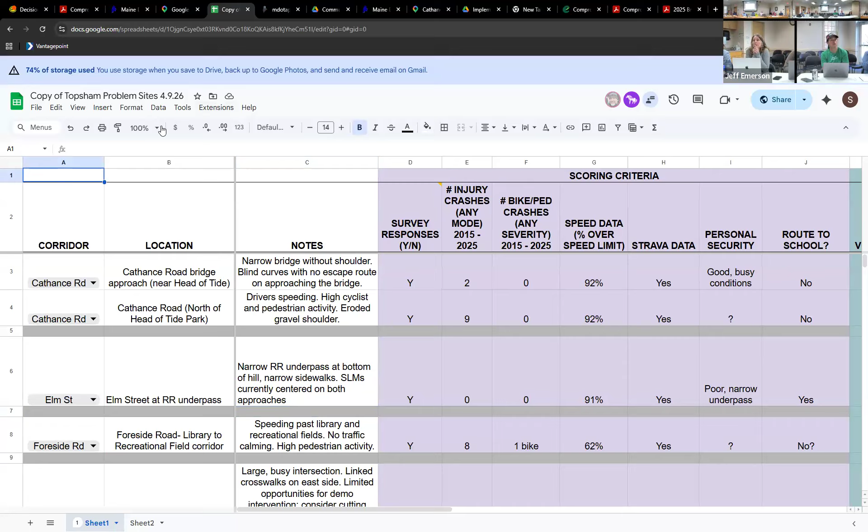Can you make it as big as possible? That's as big as I can make it. I don't know, that's as big as it can go. What if you jack up the font? Yeah, I can make the font size larger. Can you do the, just where the, can you do that thing and make it bigger? Oh yeah, good idea. Perfect.

We'll move from left to right. This feels like right now the messy sausage making of work in progress.

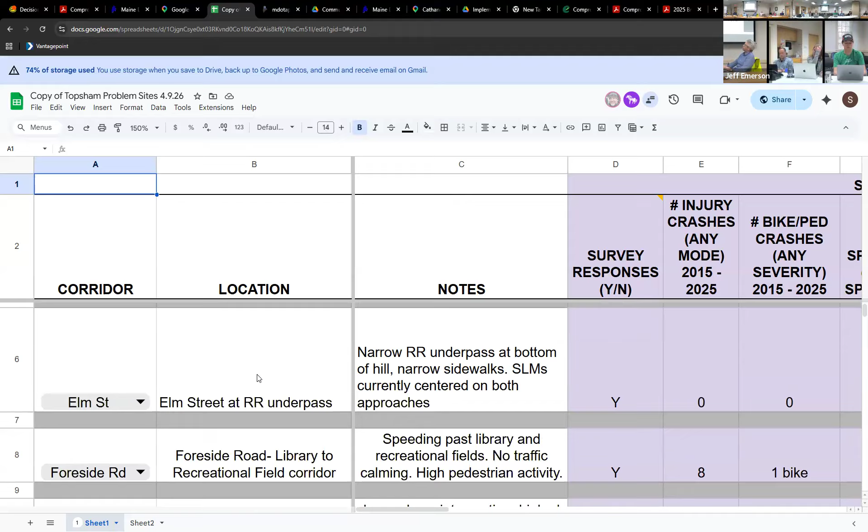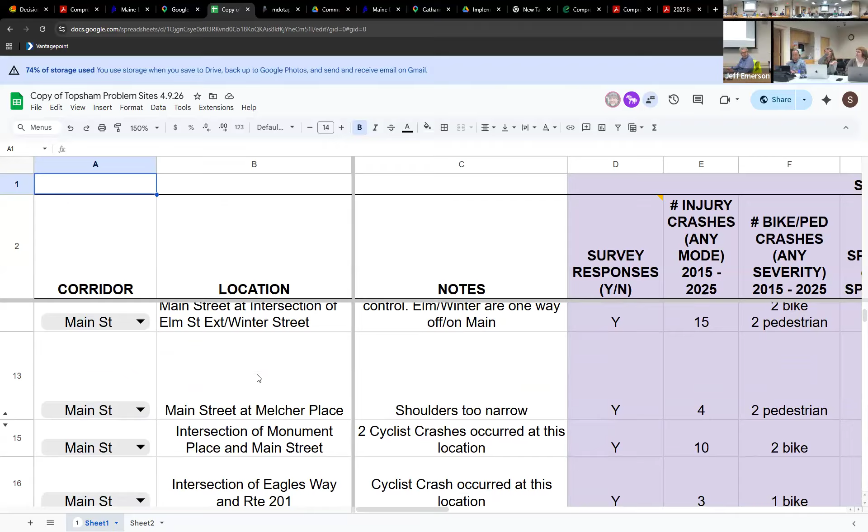What we're building out is at this point prioritized by corridor, or thematically grouped by corridor. If this seems to be working, there's a need to do neighborhood identification for things that don't quite fit. The idea is that by assigning a project to a corridor, we can have the plan lay out: here are projects related to Main Street, here are projects related to Foreside, here's Middlesex. So it's a little cleaner and easier to understand the whole palette of things you might do in a corridor.

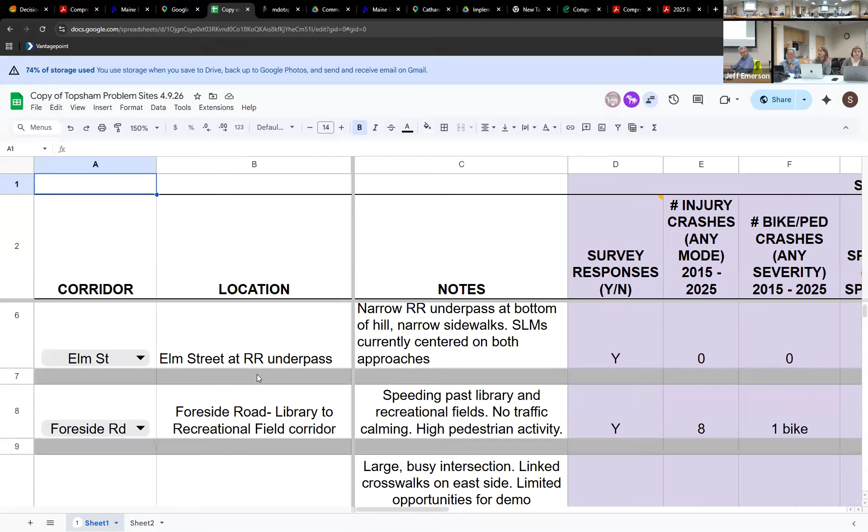It's not to say that one corridor yet is going to be prioritized over another. This is just the sorting—how do we sort what will probably be, could be, 100 different projects. Right now we're at about 30, and Sarah and Jim will talk about the data that we've been looking at and continuing to look at.

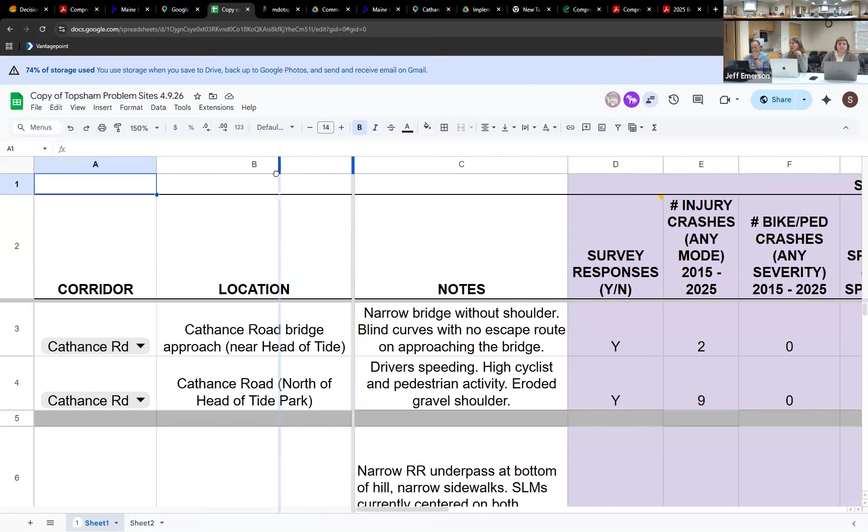If you want to move across, Sarah—we talked a bit about this at the last meeting, which is the beginnings of this scoring criteria. We are not yet assigning weights to each of these categories. We're just not there yet.

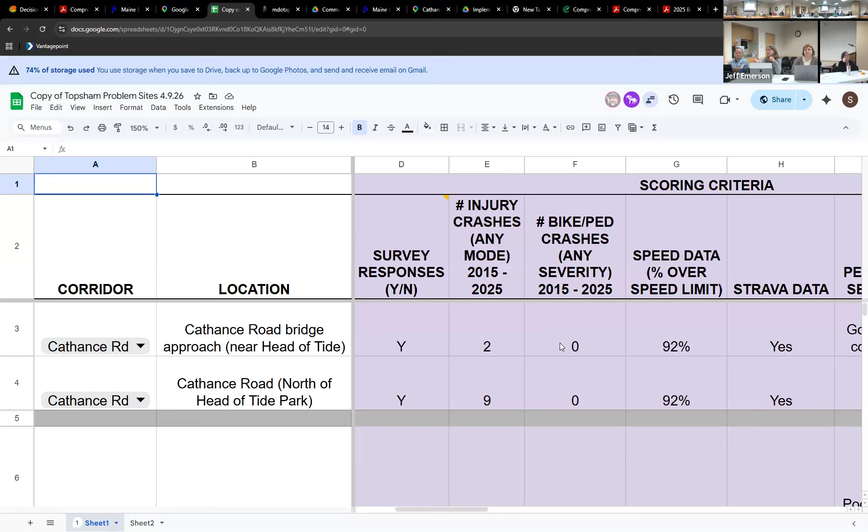Right now, survey response—we do have survey response. It's not quantitative. For me, it feels like they are data points and they are important. They do seem to align with historical work, but we didn't get 1,000 responses. So survey response as scoring criteria may be weighted eventually lighter than some of these other things, like injury, any mode, or severity of crash.

Not every location as we look at has speed data. Because not every location will have that, when we go to scoring criteria there'll have to be a way of neutralizing the places that don't have speed data.

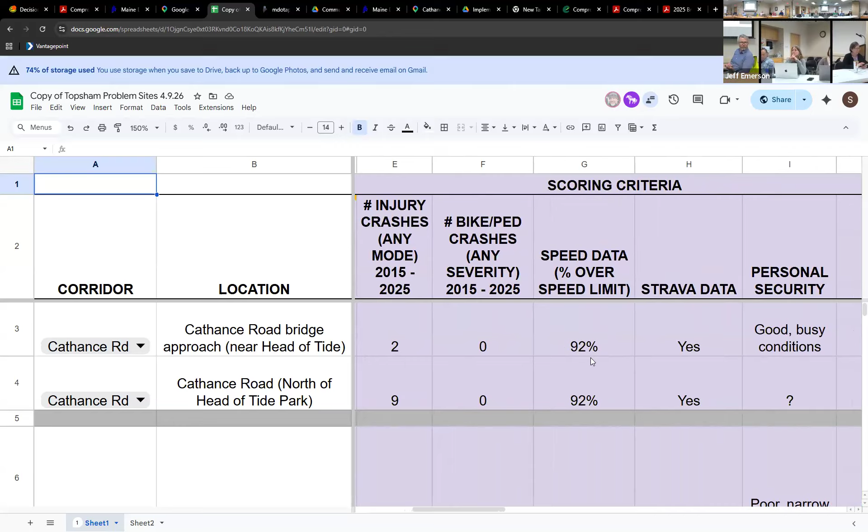You had a question? Oh, I thought you were going to say survey response. No—don't have speed data. Yeah, so 92%, that means 92% of the speed data, people were over the speed limit.

Yeah, and the data that was collected last fall, that's right. How big was the sample? It was multiple weeks. The base? Yeah, or at least a week. Great, continuous monitoring over the course of the week. But we don't know how many. He has 92%. He has a number of cars. Yeah, so...

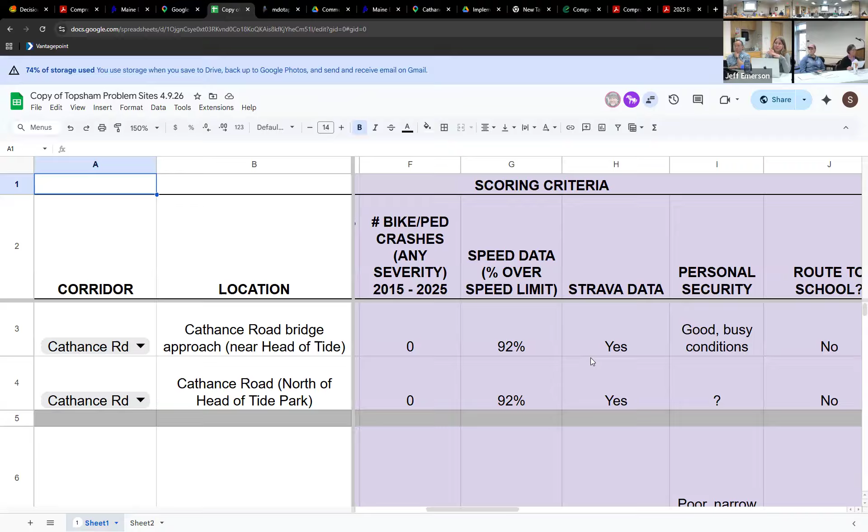Obviously some of that is numerical and it's recorded data, and obviously personal security is a qualitative feeling. So you suggested also, if it's on a safe route to school—do you want to keep going over? So we've added that one.

This is some of the information that might go into decision making. It's informational—how big, what's the volume of traffic on the road, what's the posted speed, because that balances out with the recorded speed if there is one. Some of the information is being qualitatively offered in the survey. Do you want to keep going?

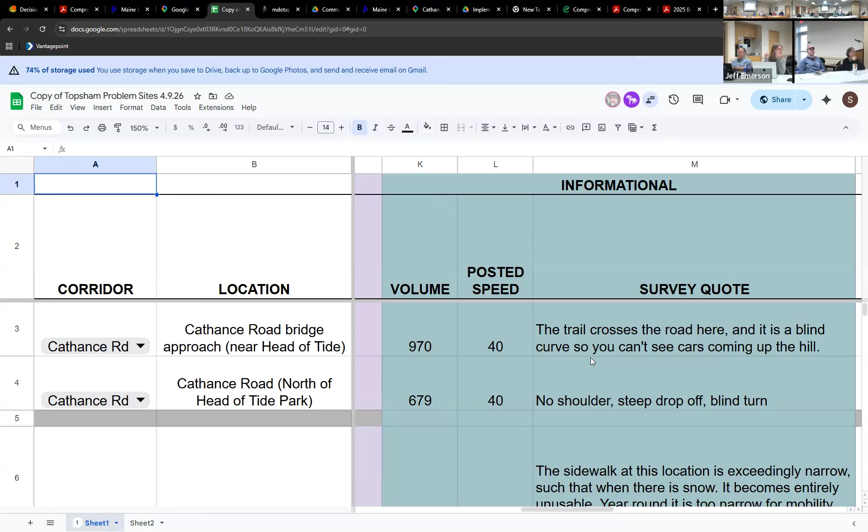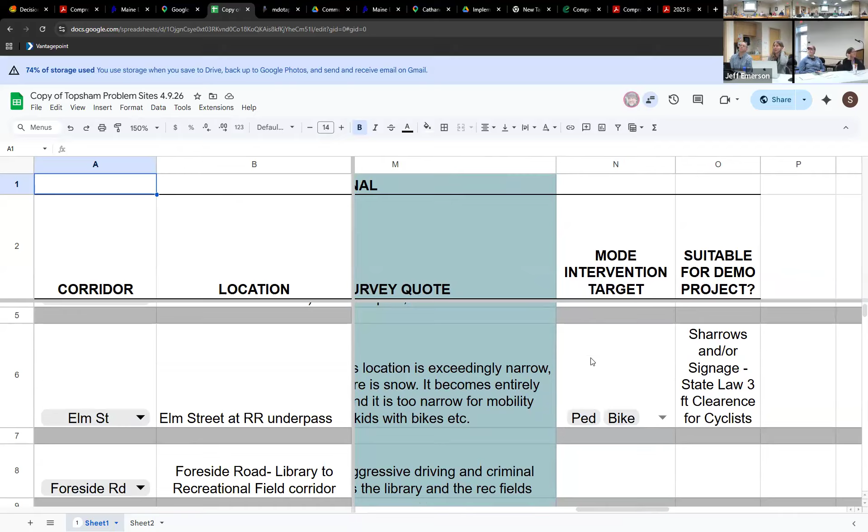This is starting to identify who will be affected by a change here, and is it suitable for a demonstration project. The reminder is that when we had just a small top of what was elevating quickly to the top, based a lot on our reading of your data without putting it through a system of ranking and prioritizing, that top is just related to demo projects.

Just so we all know, it's not just about demo projects. I wanted to make sure we're all clear that it's the whole palette of things, whether it's a demo project, or a permanent installation, or a long-term fix.

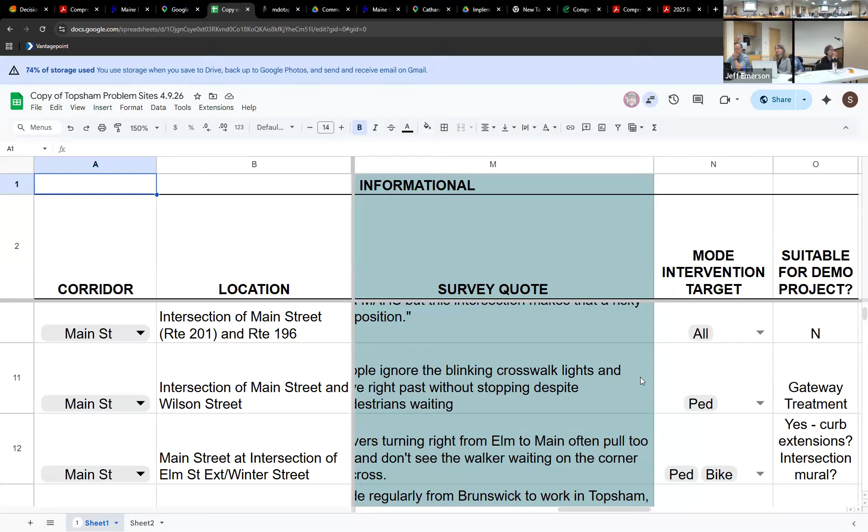The demonstration projects—some of the things we do in a demonstration project are going to be the same as an intervention that we decide is a permanent part of the program of what we do as public works and maintenance. That's crosswalk paintings, that might be vertical delineators, or places where we're installing posts to harden center lines. That might be permanent, and we might start as a demonstration project but then shift to permanency.

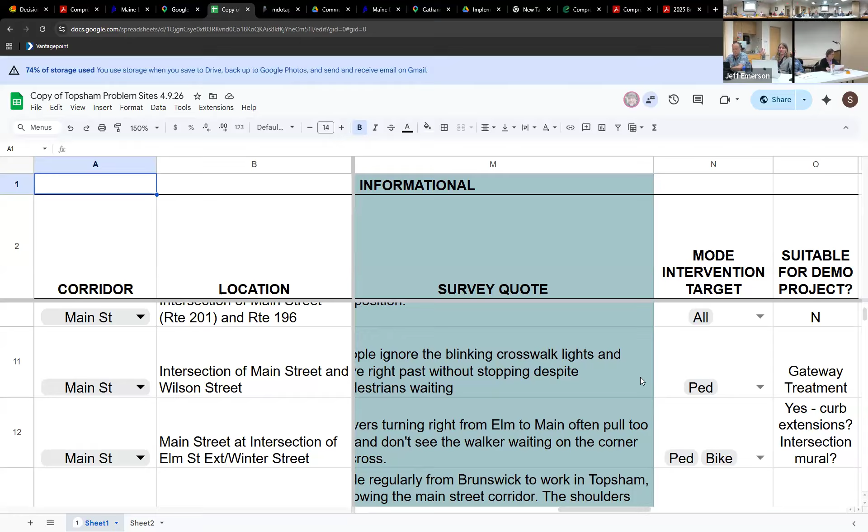This is how we're trying to get all the information into one place, to then be able to work up and respond to you with: here's a chunk of projects in this corridor, here's another chunk of projects in this corridor, and here's a recommendation for the criteria to choose.

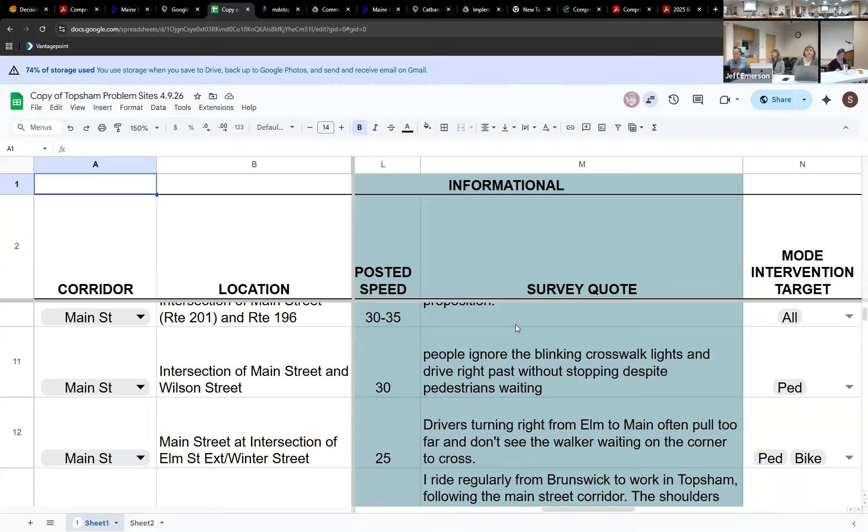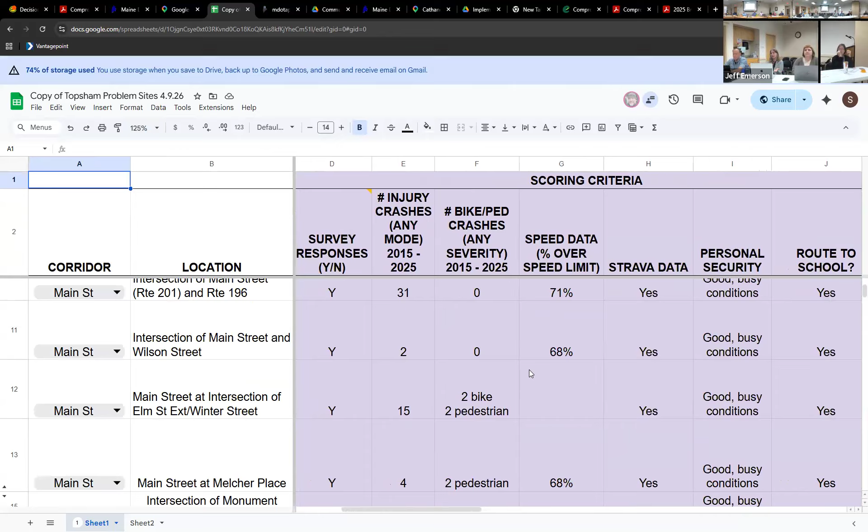That way, when we're not here, you will be able to put a project through and score it yourselves. And you've got that lasting policy in place for when a new project comes forward that might not be on this list. Because obviously data changes, right? Conditions change. Just because right now there may not be accidents or injuries in a place doesn't mean that won't happen tomorrow.

So are there any questions about how this work is evolving so far?

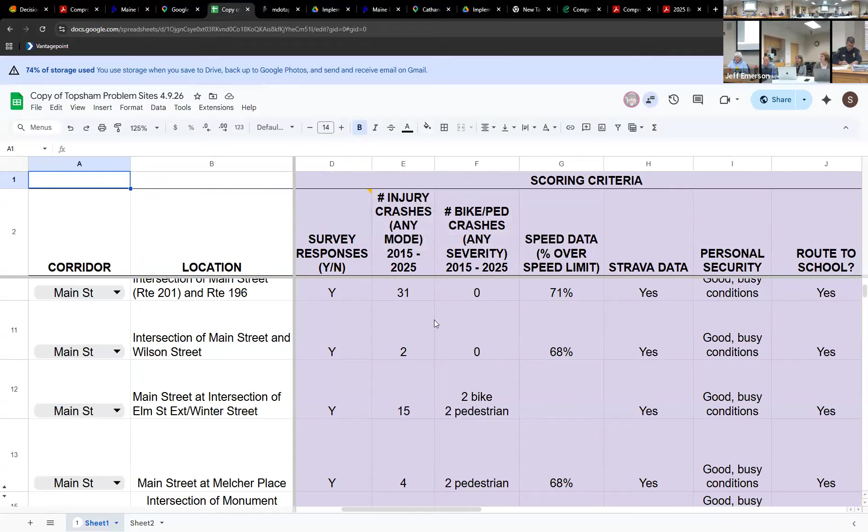So I think that is a good segue right now to having Jim talk through and make sure we do a level set on all of the potential treatments, because some of those treatments could become part of an annual public works program. Some of them might be applied locally through a demonstration project that at some point we score, and you all decide are going to be in your top list of demonstration projects.

So do you want to pull up that deck too? Yep, great, ready to go. Perfect. And by way of introduction, I'll just kind of jump on some of the points Vanessa was making.

So we have greatly expanded the number of sites that we're looking at, and we're going to be talking about it tonight. We're still going through the process of assessing them as suitable potential locations for a demonstration project. The initial run through, I looked a lot at the survey data because that was actionable information we got from your community. After last week's meeting, we decided, okay, let's cast the net a little bit more broadly to try and find criteria that will help determine locations.

That said, a lot of the locations that I presented at the last meeting do align very well with two critical criteria, in my opinion: crash data of all modes - we could certainly narrow that down to just bike ped crash data - but also the location of the site on a known cycling route as determined by Strava.

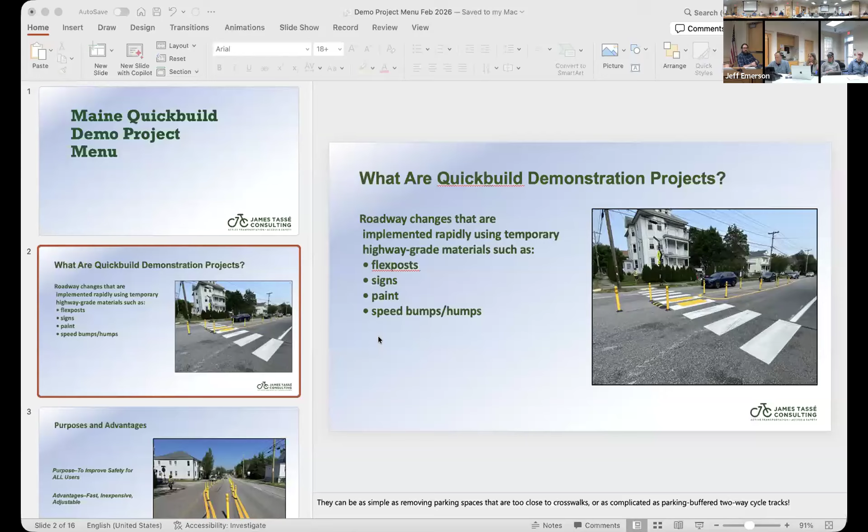While Jim's pulling that up, on the list, the table we're building out, there will be a spot to include some of these interventions, and again they might be temporary or permanent. We're going to show the images - you've seen these before, we had these up at the workshop. So some of this may not be new material for some of you, but it might be new for those who didn't attend.

To reiterate what Jim is saying, there will be places in the community where we're going to start pairing up the treatment with the point, whether it came from survey or it's a speed issue or whatever that thing is. And so that will become that menu.

Okay, can I ask a couple questions before we get into this part of it? Sure. So the big idea with the demonstration project is we're testing things, and we want to determine if X treatment has an impact on what's going on the street. That's right, mostly driver behavior. So if we were to look at Elm Street, for example.

You want to limit the number of things you're changing at once to figure out if one thing works or another thing works. Or that's a different question. So let's also tease out trying the thing out. You might try the thing out because that is the technique you will use year after year after year, and you've agreed that it works. Or you might decide that technique works and it sets you up for a permanent reconfiguration.

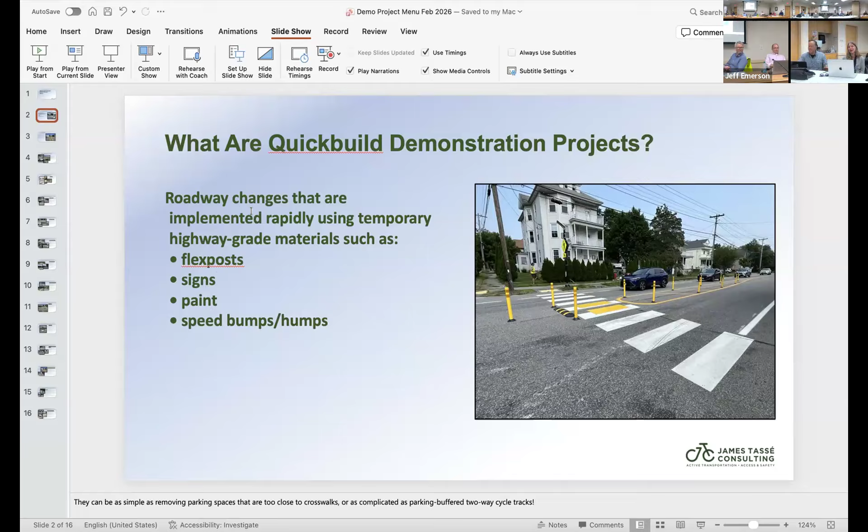So in a nutshell, the Quickbuild demonstration projects are just roadway changes that are implemented rapidly using temporary highway grade materials: flex post signs, paint, speed bumps, humps. You'll sometimes see references to tactical urbanism, which is the term of art that DOT hates, calling it tactical urbanism because it sounds like militant guerrilla activity, and it's not—it's transportation planning. It used to be 15 years ago. But the projects that I design all use MUTCD approved things that towns go out and buy and put down anyway. So we're not using any painted spare tires, we're not using hay bales, although I have no toilet plungers. No toilet plungers, no pumpkins—even though they are nature's traffic cone.

So the advantages of demonstration projects is that you can test designs that try to improve safety for all users, not just people walking, biking, but people driving too, in many cases. And the advantages are it's fast, inexpensive, and it's adjustable.

And what you're looking at here is a hardened median that we did on Washington Avenue in Portland last summer.

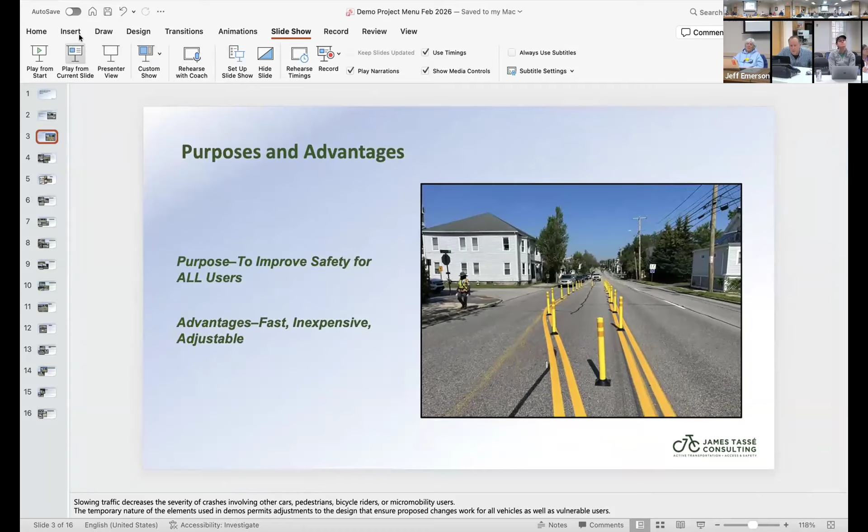I wish I could make that bigger. Maybe I can. Presentation mode. Bottom right, slideshow, bottom right. Start. There we go. Thank you. We're going to continue to share. Yes. All right, oh look at that.

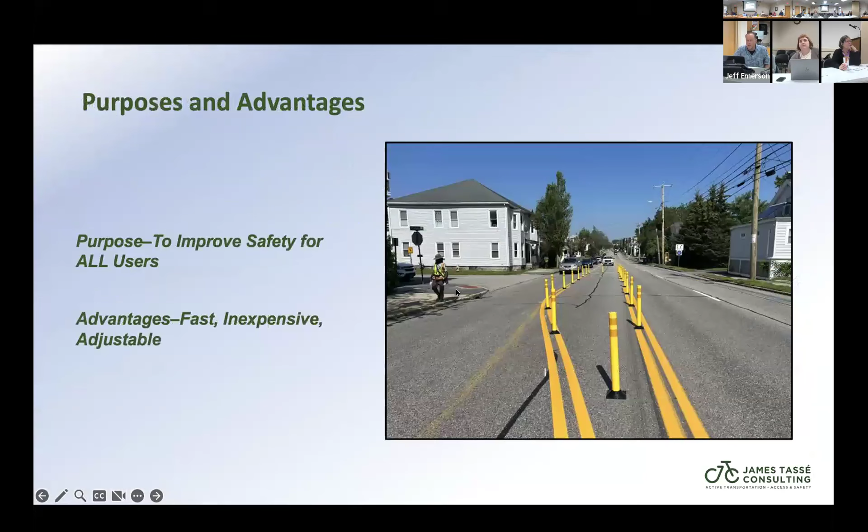My arrows work now. So the suite of demonstration projects I've used most commonly in Maine include curb extensions, crosswalk gateways, very popular, visual pedestrian refuges, found a few locations for that as we were driving around, freestanding gateways, visually separated shoulders, which are separated but not like crash proof. It's not a protected kind of separation.

Yes, he's going to go through each one of these. Let me just, a lot at one time. If you keep asking me questions, we'll never get through. Wait, can I ask one other question? Oh sure. Will you provide this to us, or do I need to? Because I just don't want to. I think Sarah's already got it. Yeah, it might be in that folder.

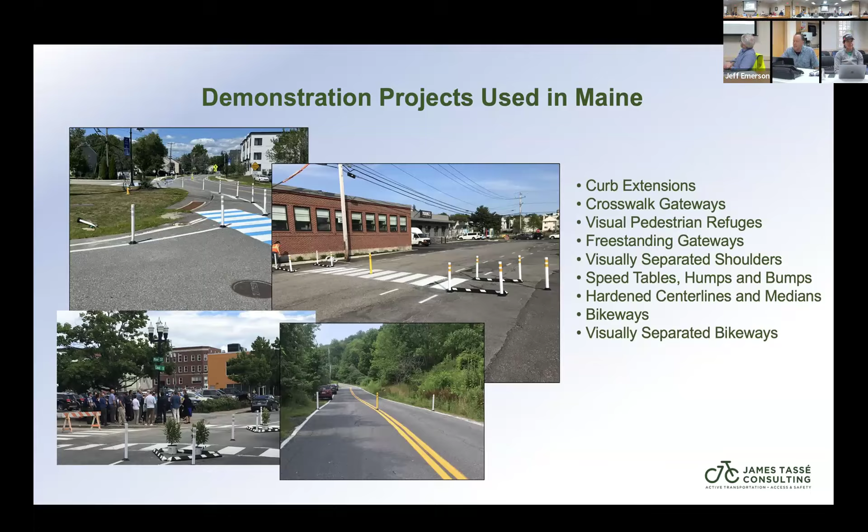Great. So speed tables, humps and bumps, which are all different things, hardened centerlines, medians, bikeways, and visually separated bikeways.

All right, another question, comment? So does everyone know what a hardened centerline means? No, I'll talk about that in a second. All right, so all those technical terms are going to get explained. Yeah, well, we're going to talk about all these.

These are just some of the typical materials. This is what a flex post looks like. That's the white thing. That's called a flex post. You can hit it with a car and it's not going to break your car.

Ideally, you wouldn't hit it with things. Your phone, your technology is doing something. Why is she calling me? Like my sister-in-law.

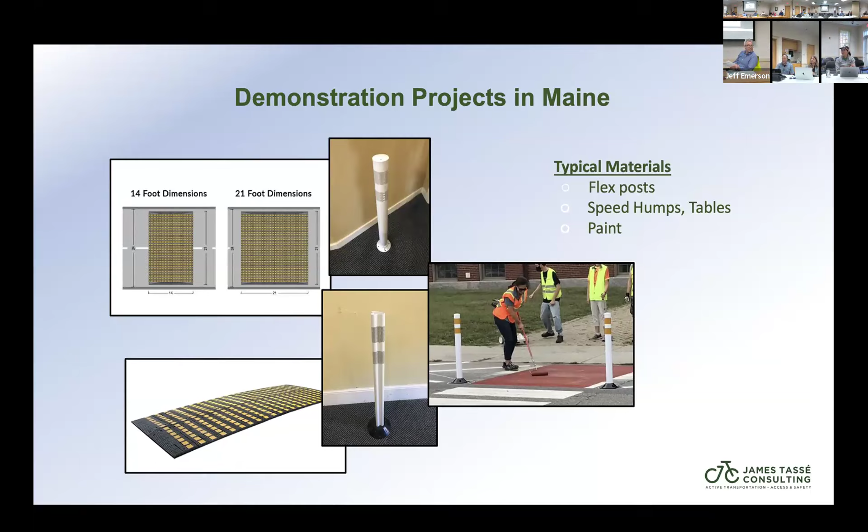So the white post you can hit with a car, it's not gonna damage the car. Although fire trucks don't like to straddle them because there's sensitive stuff under fire trucks. We have to think about that.

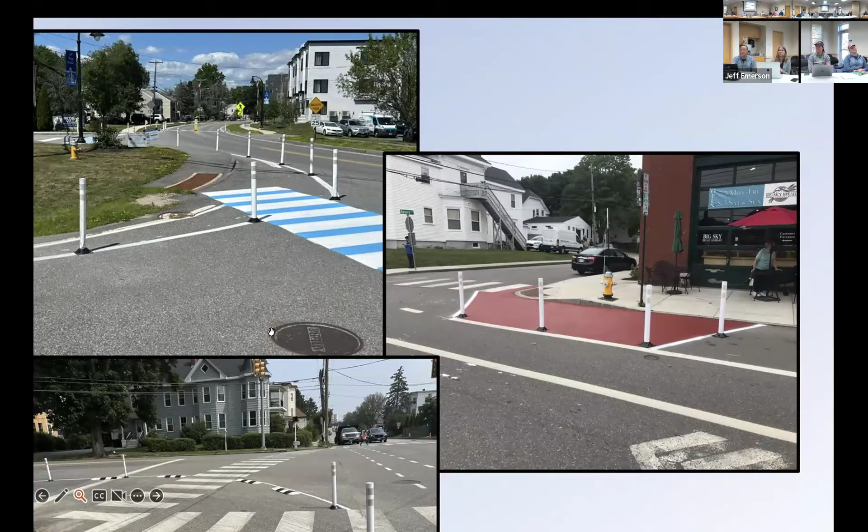This one down the bottom here was an ambitious one we did at the intersection of Washington Ave and Presumpscot in Portland. Gets a ton of truck traffic, super busy. You can see, we reclaimed close to 25 feet of roadway, shortening that crosswalk substantially. And these elements here are mountable because a lot of truck traffic goes through here, so we wanted to do something that the trucks could just roll over.

Eventually, all of these flex posts were sacrificed for the cause and replaced. Again, that's why they're adjustable, they're tweakable. The flex posts were getting hit too often, so we got rid of them. It kept the cars out of there, but the trucks, if they needed to, cut that corner a little bit - usually they didn't, they just could roll over it with no problem.

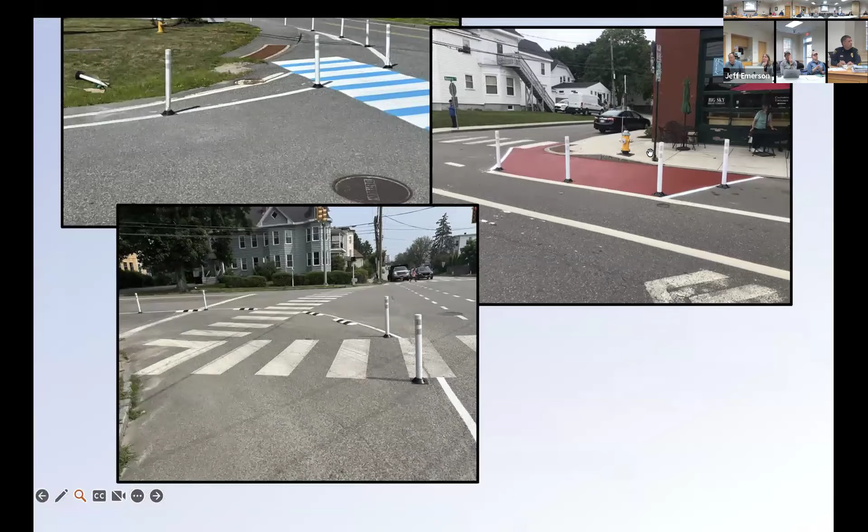And what you see here, upper right, is also Portland. This is down by, I'm forgetting that. Looks like the West End. It is this, no, it's right at that big - Back Bay, Deering or something. It's Deering, is where it is. Yeah, but anyway, so that Deering Center by that bakery. Yes, that's Big Sky. Right next to Big Sky. That's exactly what that is.

So that's a project that I did with, I want to say West, maybe it's the West End Neighborhood Association, but they wanted to do stuff that would calm traffic down there.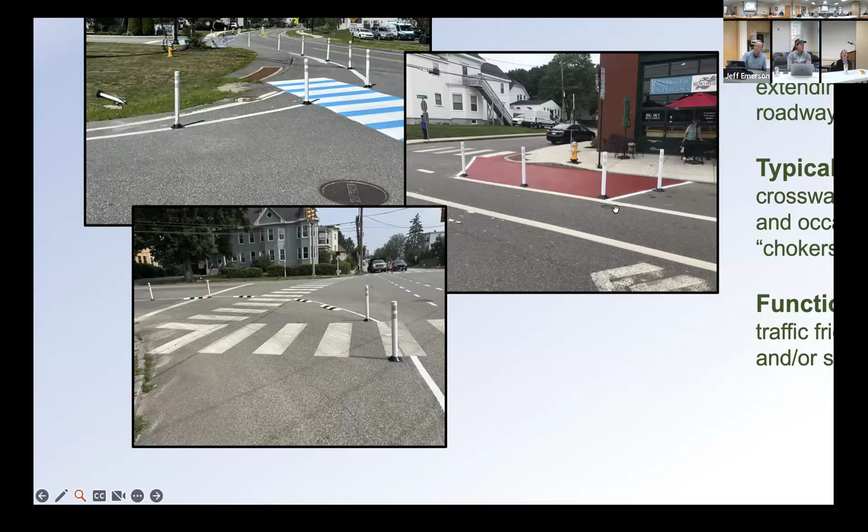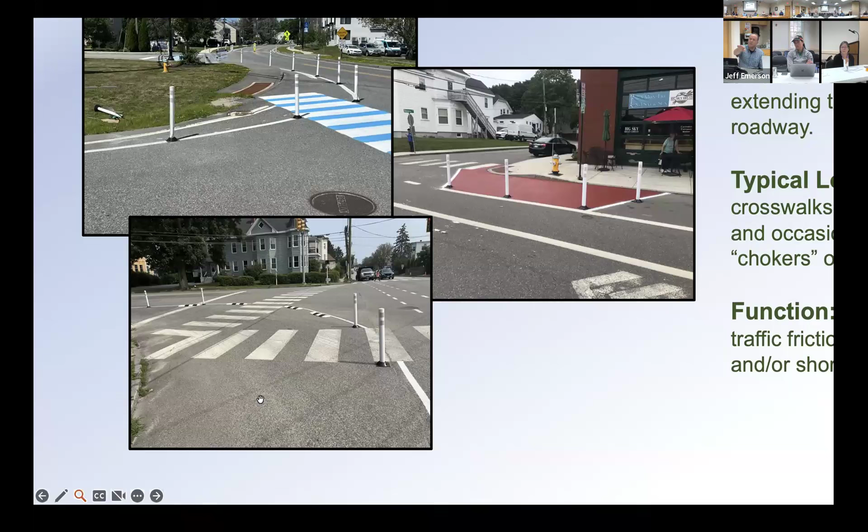So the curb extension is simply what it describes. It's taking the curb line and bringing it out further so that you narrow the street and create more friction that tends to slow cars down. It can also be used to shorten crossings, as you can see in this Portland example and this Presumpscot Portland example. And it slows the rate at which vehicles make a turn, so instead of cutting the corner and going fast, they have to make a slower, more deliberate set of turning movements.

Very effective. Before you move off that one, the red one would be an example of something they'd repeat and do annually because that's a brand new road, so they're not going to pull that curb out anytime soon and replace it. It's been reconstructed, they kind of missed doing a curb extension, so this is likely what we'd call the temporary, more permanent fix. Yeah, they've had that installed for the last 3 or 4 years.

This one on Washington Ave, though, is testing an actual designed hardscaped curb line that's supposed to be built this summer. So watch out, Washington Ave's gonna have some snarls on it. But that's the idea, that they're bringing the curb line out that far, and this was very much an experiment and a test.

So for the ones that are done annually, like that red one, would the idea be to remove those in the winter for plowing, or would you leave them?

So generally you pop them up. They go down with butyl adhesive, which just sticks to the road, and they come up with a shovel pretty fast. That said, in the world we're living in, winter is getting shorter and warmer. There's a flex post - when I used to work at BCM down on Diamond, I did an installation there, and there was a yellow flex post in the center of Diamond, right where the Bayside Trail crossed, that lasted 3 winters.

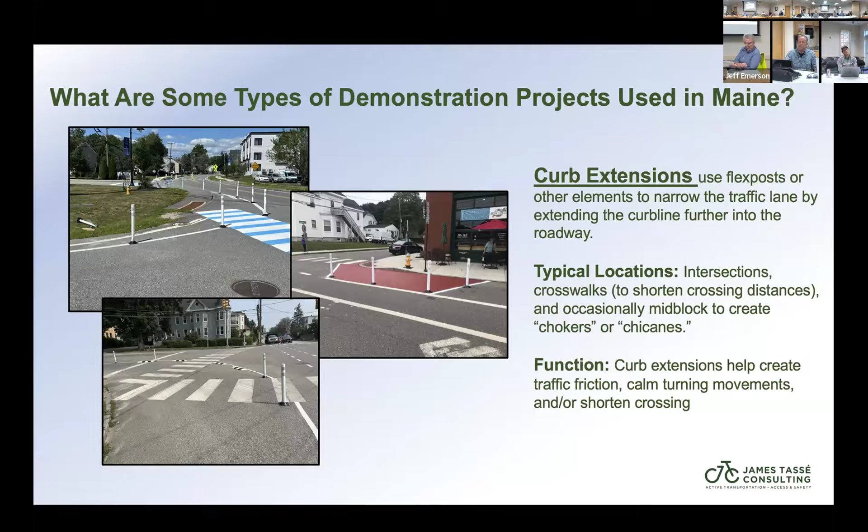It was designed with an 11-foot lane with like a 2-3 foot offset, so it's super wide, there's nothing to slow you down, so we choked that down. And that's what a lot of these projects are intended to do - they're intended to slow traffic down by creating friction and narrowing the road.

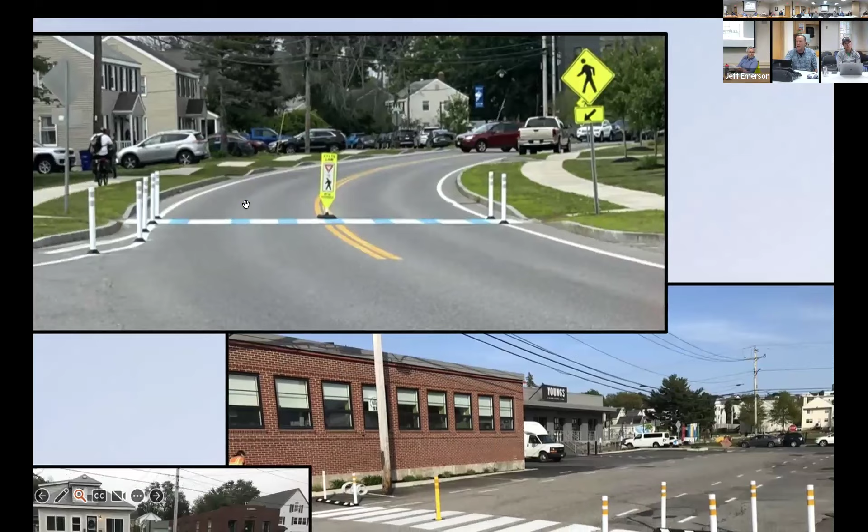Now, related to the curb extension and often used in conjunction with them are crosswalk gateways. Basically, you put a couple of elements on the white line on either side of the center line. In this one here, we're using what's called an R1-6 sign, which basically just says state law - that drivers yield to a pedestrian in a crosswalk. The law actually reads, any pedestrian showing intent to cross triggers a yield on the part of a driver.

This is actually in front of BCM - this is the installation we did that takes you from the parking lot near Rising Tide over to Coffee by Design. Very popular crosswalk, and that continues to get installed. These are how we made safe landings in a place that otherwise a vehicle could encroach on. Maine DOT will not let you put in a crosswalk unless it goes from a place of safe landing to a place of safe landing.

This project here was a really cool one that we did on Broadway in South Portland. I consider this a visually protected pedestrian refuge - I mean, a car could still get in there, but it does create a little bit more conspicuity. We could have even put a third post in the middle here to give more sense that cars aren't supposed to go there and they probably won't. And that's using 2 speed bumps as an additional element.

So that takes me to visual pedestrian refuges, which you see, that's the one we just talked about. Here's one we did on Washington Avenue, which shows a way to create a little more friction around a crosswalk.

There's a number of places, as we were driving around, there's a big yellow traffic island painted on 201, right near Wilson Street, I think it was.

Yes, I was literally just going to mention that. Was that there before? They just painted that the other night. Was it like that last year? We saw a lot of fresh yellow paint around. I don't remember that being there last year.

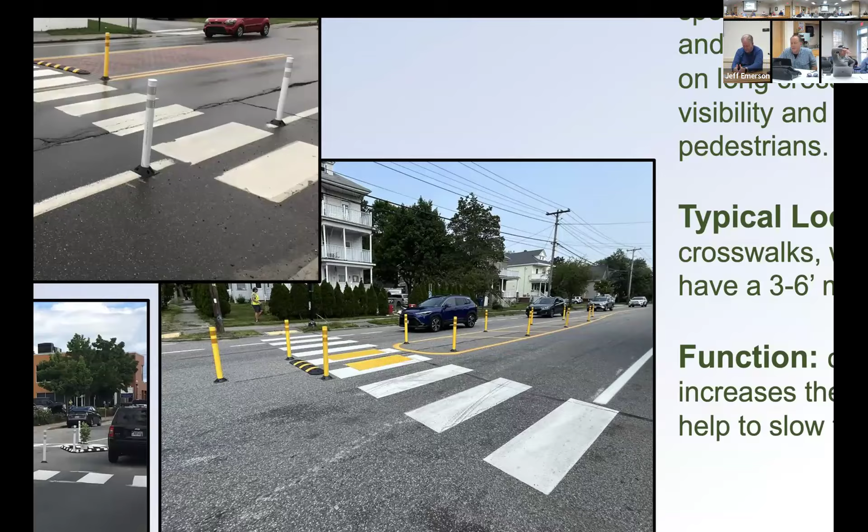Right when you turn onto Wilson, where that crosswalk is by the little forest sort of thing, there's a painting, and we did a traffic island with stripes to make people more aware.

This one's more—this is one I did with Tom Nosal and John Mahoney for Build Maine in Lewiston.

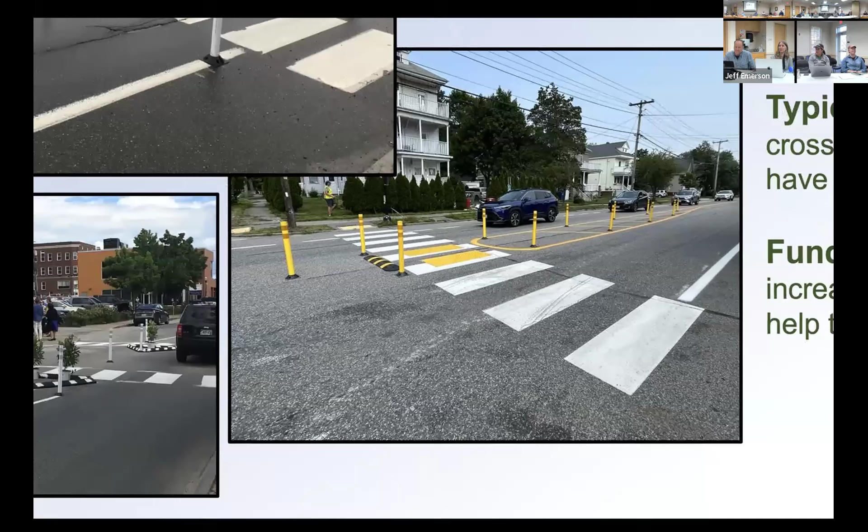I think the point here is that the permanent installation to green up and change the aesthetic of the street has a cost factor that's much different than a $30 flexible delineator.

So sometimes one of the things you might hear is, well, this is ugly, I don't want it to look like this. So it's being cognizant that depending on what you do for that intervention, it may get a negative response, partly because—I think it looks better than the other one—but if the aesthetic isn't high enough, you might get negative responses to something that might actually be working.

Well, yeah. Like this one, both of these—the real solution here would be a curved median island on this end, and then this would all be curved up, and that would make it look better. Maybe you could put some low shrubberies in there, as we see here in this project in Lewiston.

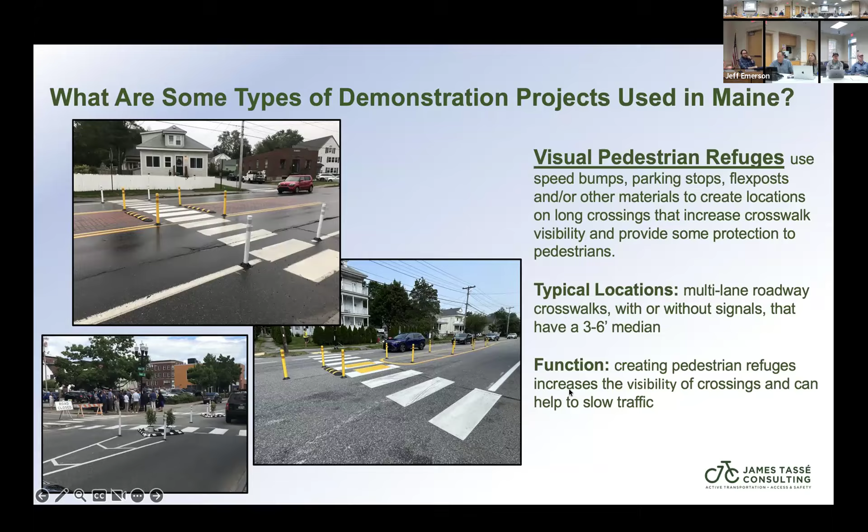So those are both testing the creation of what could be a more permanent design. But in the interim, everything you see here is low cost, less than $2,000 installed, which from the transportation point of view is ridiculously low.

These are freestanding gateways, similar to the crosswalk gateway, with an element on the center line and elements on the edge. This is actually a project that Vanessa and I worked on in North Yarmouth, where we created freestanding gateways on the approach to town to create some friction as they came into this village area.

So here you have a triple freestanding gateway, and here you have a freestanding gateway. This is in Mount Vernon, on some rural roads that come into the town.

People are coming in hot, and they said, what can we do to slow things down? DOT won't let us put down a speed table right now, what can we do instead? We did this—lower left here, this is the approach. These things all had the desired effect.

This project in North Yarmouth, I swear I've been coasting on this one for a few years, because we took a situation where 80% of drivers were exceeding posted speed significantly, and flipped it over to 80% compliance. That got DOT's attention, that got everyone's.

Also, the process we used sort of set the pace for doing street demonstrations. We did the collecting of data, the community forum, the test, worked with the fire department and public works, then did more data, and then another community conversation. Because we were very deliberate with all of those steps, I think we had good success.

This is also the place where in town we had used these very large blue pots to put some vegetation in, and all we heard from people who didn't like it—who were anti the project—was, oh, that Dixie Cup project. So you gotta watch the temporary materials you use, because you might get skewered for the Dixie Cups. But the data was undeniable, so the criticisms didn't really matter.

Anything you do will get hostile feedback, and you'll hear it, your DPW director will hear it, the select board might hear it. That's why data is really important. But the thing to keep in mind is that a lot of the time people are objecting and complaining because it's having the desired effect. Negative feedback does not mean it is not working, it probably means the opposite. People are like, I can't drive as fast as I want everywhere anymore, I have to slow down. It's like, good.

Let's talk about the intent of those for a second. Those are places where you're probably never going to install a sidewalk, and they may be places where the rural nature of travel is 35 miles an hour, maybe a little more. People are walking it, using it actively, it just doesn't support a permanent separated facility necessarily. Maybe part of the Casco piece did, but North Road would never do that. Maybe with their reconstruction there might be a paved shoulder and then tight fog lines with a tight travel lane in the center.

This can also work in a residential neighborhood with some on-street parking, moving through a corridor segment, if there's speeding you can create a series of gates that you go through. My street in Bethel has a school area but a very wide street, and I'm starting to talk to people about putting those in to create gates you periodically drive through as you move along. It's a great tool for the edges to slow things down, but it can also be used when the street is just too wide.

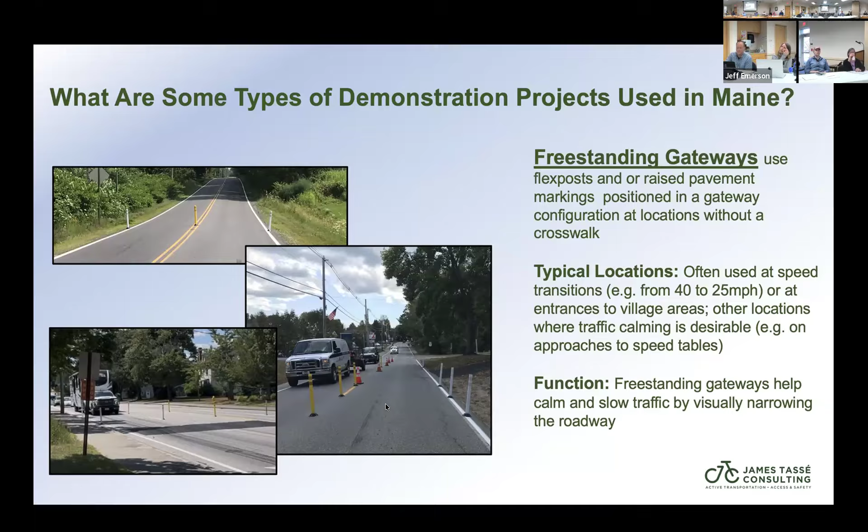I'm doing a project up in the Bangor area where we're doing a whole series of freestanding gateways on a residential corridor where speeding is a concern. The road doesn't have much shoulder, too narrow to be much else. Mallet Drive, we drove up there. That might be a possibility.

This is a speed table. There are speed tables, speed humps, and speed bumps. Speed tables are big and wide. This is a project we did on Route 1 in front of Thornton Academy in Saco. Hugely complicated, expensive project, but really successful. Steve Landry from the DOT highlighted this as his favorite demo project of the year last year. It made a real impact on drivers, slowed things down, and a lot of people liked it. There's a couple of crossings, as you can see, and it made that a lot better.

This is a possibility in some places, but these units are expensive up front, in excess of $5,000, and they're very labor intensive to put down. But they're temporary, so if you try it you can borrow the speed table from the DOT, and you have to bolt them down, they're very complicated to put down. So then they make the case for a permanent installation. Right, that's what we're doing.

So there's a question over there. I've heard some feedback from other towns that sometimes this can be challenging for emergency response. But what I've heard is they can overcome that by putting sections down that large trucks like fire engines can straddle, but maybe smaller cars cannot.

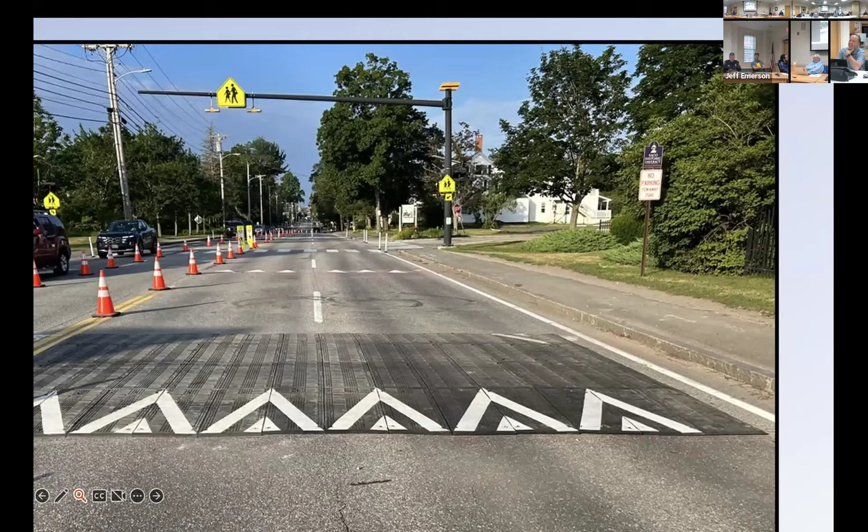But the speed table, I got some video of people flying and just hitting it hard. It's like they only do that once. If that's bothering you, you're exceeding the speed limit by too much, because you can hit this thing at 30 miles per hour and it wasn't a big deal.

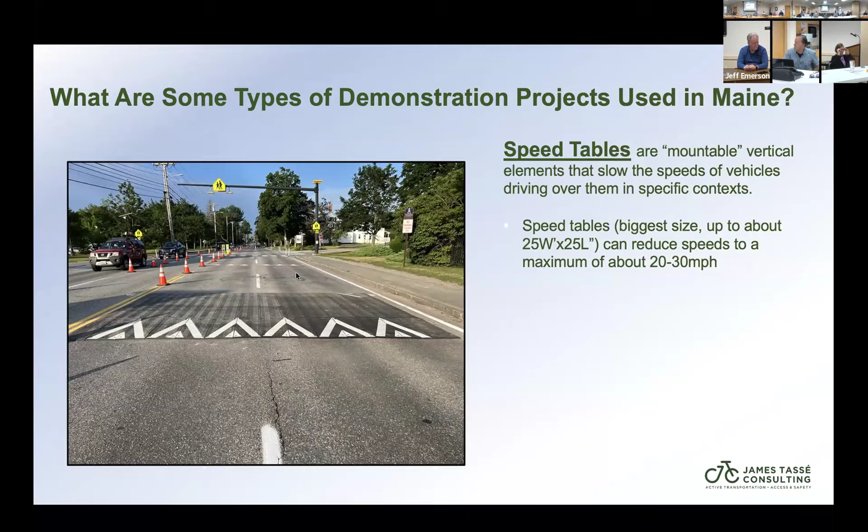Speed humps are similar but a little smaller. This deck was used on another project and I think someone edited it a little and I didn't clean it up, so I apologize for that. But a speed hump is a similar idea, just a wider speed bump.

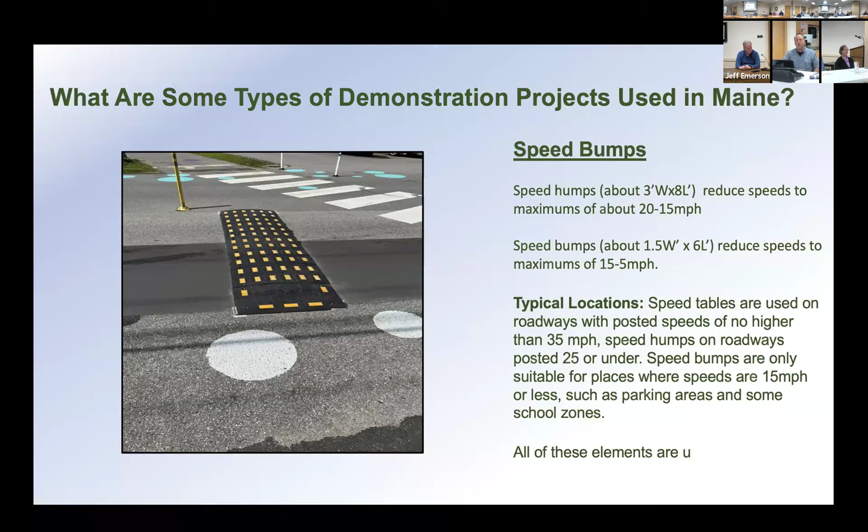Whereas a speed bump might be only about 14 inches wide, 12 inches wide, a speed hump will be almost 36 inches wide. It'll bring speeds down to about 15 to 20 miles per hour. A speed bump is what you use in a parking lot when you really want people going super slow, or when you want to use them as mountable channelizers.

So I've shown you this image from Washington Ave. This is from a project, I think I have more images than this one, in Lewiston, where we had a place where cars were making turns and trucks might encroach on a two-way bike lane that we created.

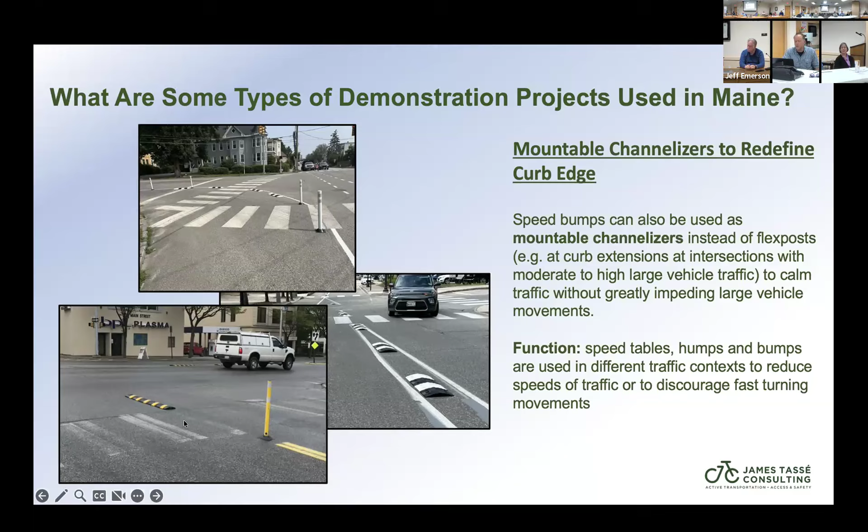So we used them. This is an example of centerline hardening. This installation carries the center line further out into the intersection, forcing cars to make very deliberate turning movements around them, or they go over the bump. A big truck, I don't care, go over the bump, but someone in their BMW may choose not to. This makes for slower, safer turning movements, especially in locations with crosswalks, very helpful in calming traffic generally.

Let me fly here a little since we're running out of time. Hardened center lines can also include medians, which are just expansions of the center line. By putting flex posts down on them, you've made them less permeable, so cars don't drive across them as much.

This location down at the bottom, we were actually closing off left turns from Washington Ave onto a road. It's a documented high crash location. This is actually the turn, and this was very successful.

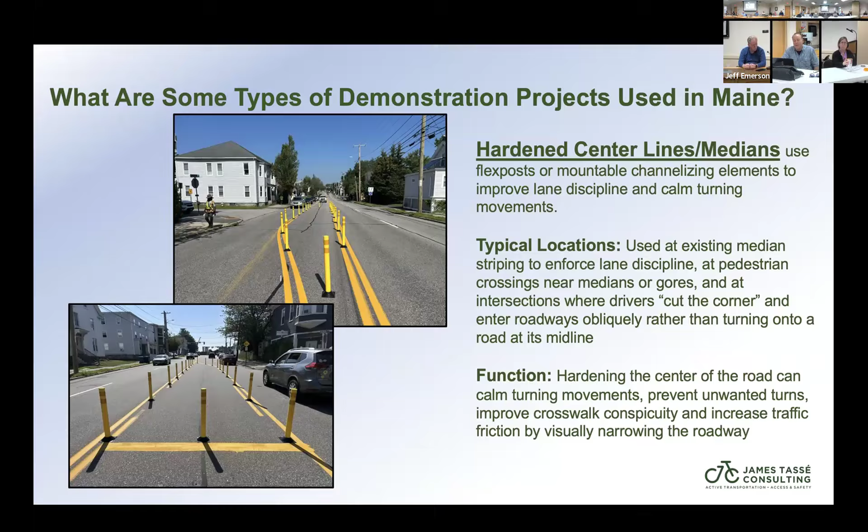What's wild is that we finally got it up in late June, and it stayed up until November, and none of those got hit, or barely any got hit. So that was remarkably untouched.

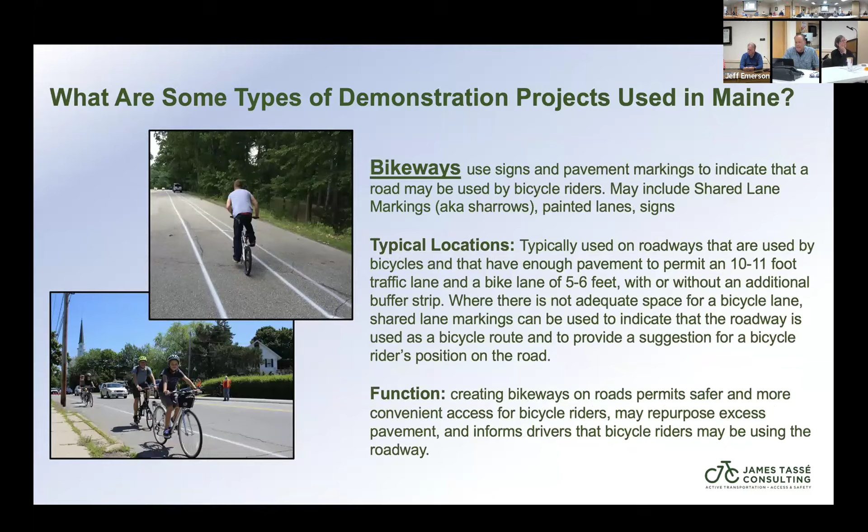Bikeways are just what they sound like - putting stripes on the edge of the road and stenciling them as bikeways or bike lanes, one of the typical uses. This is a more elaborate version where you can visually separate it, bringing together that visually separated shoulder but making it a specific bike accommodation.

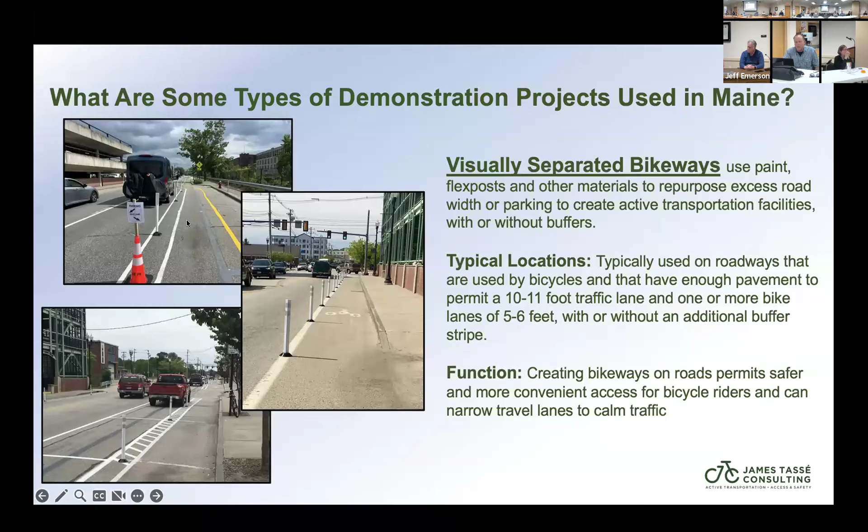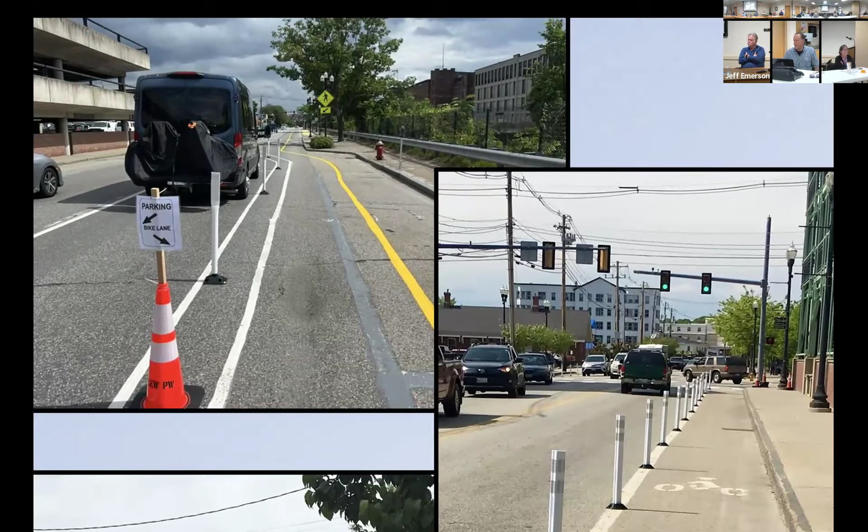This one up here is actually a two-way facility we created in Lewiston last summer. Again, huge benefit in terms of calming traffic by taking up some space on a two-lane one-way street that was just a racetrack, and this created a lot more friction. I have the speed data on it - you can see the day of installation, the speeds drop dramatically. It was really pretty cool to see that one.

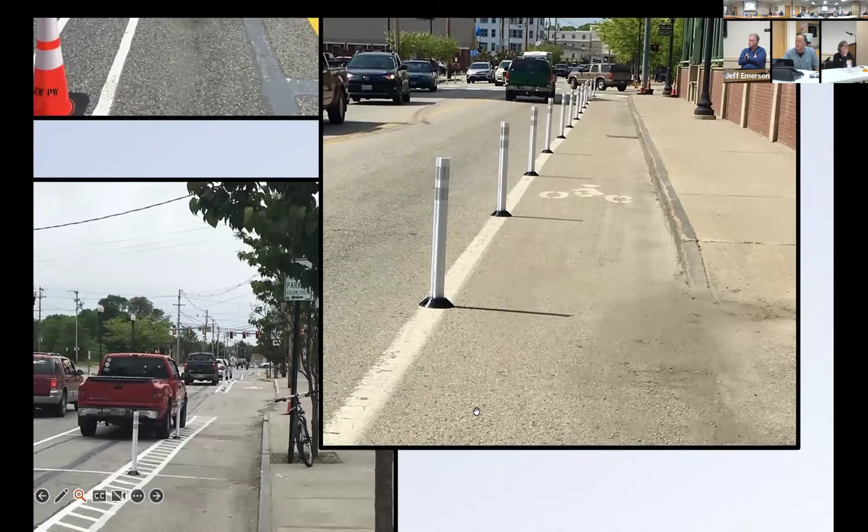This is a project again in Lewiston, just putting some flex posts along the white stripe to enhance separation. Also in Lewiston, where we had more of a buffer strip, we put flex posts in the buffer. And I think that's it - those are the kinds of things I've done in Maine.

If you guys, having seen them, have that get your creative juices flowing a little bit, like 'oh boy, we should do something like that here or there or the other place,' communicate with us and we'll put it in the hopper. When we're getting closer to the moment of selecting where we're going to make designs, we'll get back to you with some ideas.